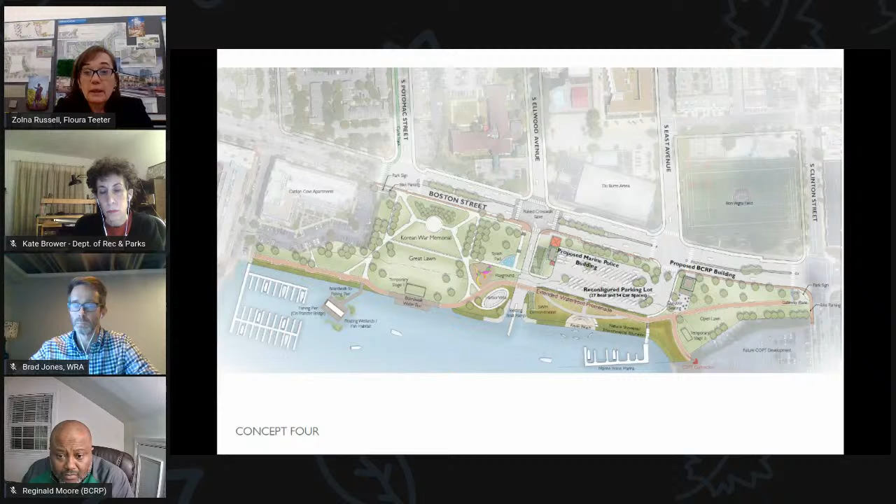So these are just some of the things that we've looked at. All of these concepts were presented to the public in public meeting number 2, and then we did receive quite a bit of feedback on that. This is just a summary of what we heard.

It was definitely preferred that the Marine Police stay on site. In addition to providing eyes on the street, they help people who go out in boats and get into trouble or get stranded. They do provide a lot of security. They've been a very good partner to Baltimore City Park and Recs at the Canton Park, so people definitely wanted them to stay.

Reducing the size of the parking lot was something we also heard as being desired. If you were involved in the earlier meetings, you'll recall that we did a parking study, which told us that the parking lot was actually sized adequately for the use, but then we took a look at who was using it, and there was a lot of use in the parking lot that was not necessarily related to the park. So we have looked at reducing the size of the parking lot.

The preference was for one building rather than several buildings scattered around the site, better access to the waterfront, providing a play space for children, reflecting the history of Canton and of Baltimore, providing more shade and trees, better access for kayaks, both informal and for programs, and then cleaning up the trash. So those were the things that we had in our minds as we went forward to develop this draft master plan.

As part of the master plan, there are several unifying design elements found throughout the park, such as benches, trash cans, improved lighting, and bicycle amenities. The promenade is probably one of the more dominant features of the park, along with planting more trees. Those are things that really pull it together.

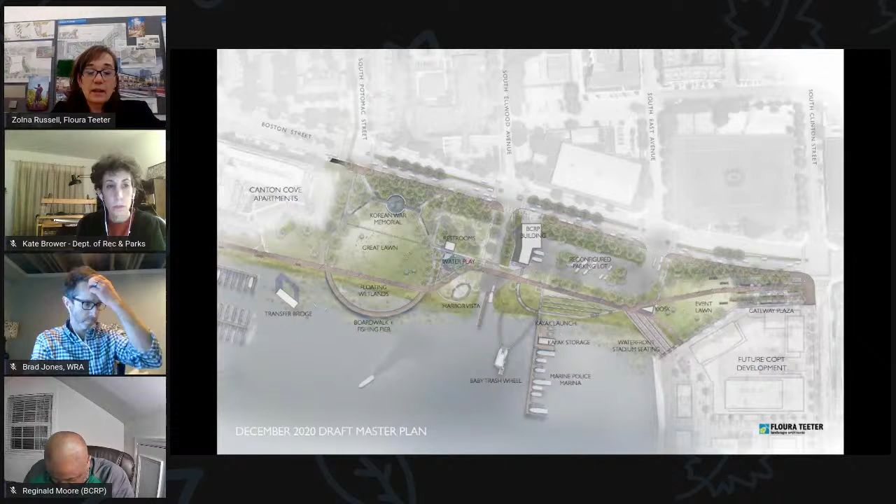So making sure people can arrive at the park safely is very important. And the bike cycle track that comes down South Potomac also has to have a protected crossing so people can get to the park via their bikes.

The parking lot has been reduced and reconfigured. It currently has 35 boat spaces, which translate into 70 car spaces. We've reduced it to 10 boat spaces, or 20 car spaces. This includes space for the Marine Police to have garages actually in the building so they can pull their boats in and out and won't need a lot of surface storage to store their equipment.

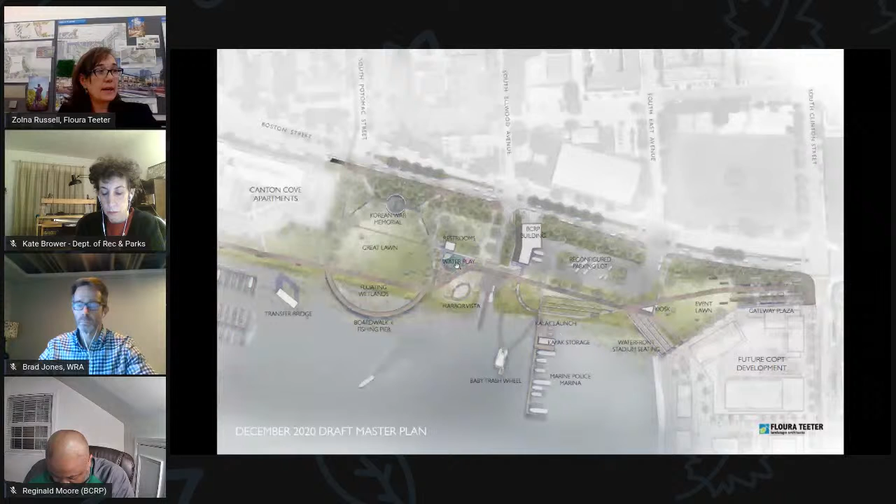In this area, we have an enhanced grove of trees with hammocks and other seating, a new restroom building, safe and clean, and a water play area, which is a combination of a splash pad and an artistic play space. We're envisioning unique and custom play equipment that can be used both when the water's on and when the water's off, creating an exciting opportunity for children who visit the park.

And then the Harbor Vista, which, if you've been to the park, you'll know is the promenade or the promontory, where you can stand and really see almost everything that's ever happened in Baltimore, right back to Fort McHenry, to the industrial waterfront, to new development happening in Tide Point and in the harbor. It's the perfect place to tell the history of Baltimore, envisioned as a place where history is interpreted to visitors.

And then the Great Lawn, where most of the WTMD concerts and big events are held, is enhanced by improving the lawn there.

A new low seat wall is envisioned for the border of the Korean War Memorial, not only to denote where that border is, but also to honor the Korean veterans with inscriptions carved into the wall.

And then the promenade, which comes into the park from the west, will continue across the Great Lawn, come up between Water Play and Harbor Vista, cross the boat ramp, and then continue south of the parking lot, and go up through the Gateway Plaza, where it terminates. This is intended so the promenade, which will serve both bicycles and pedestrians, connects to the Greenway across Boston Street.

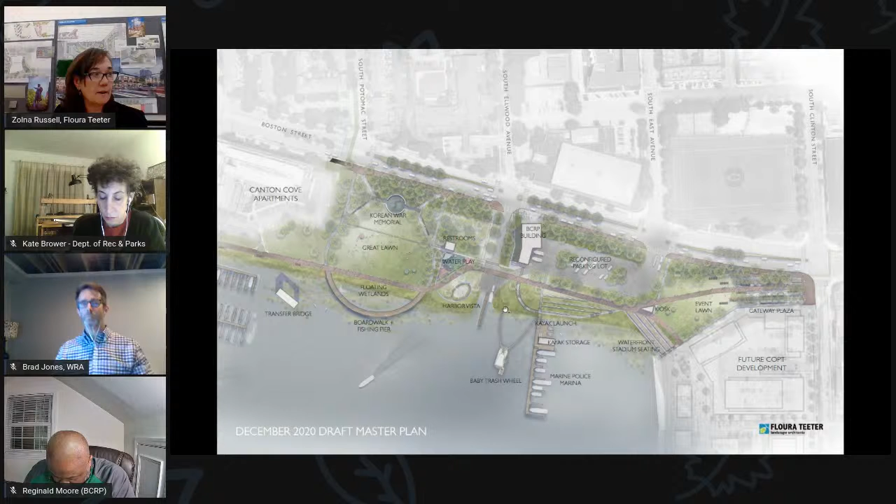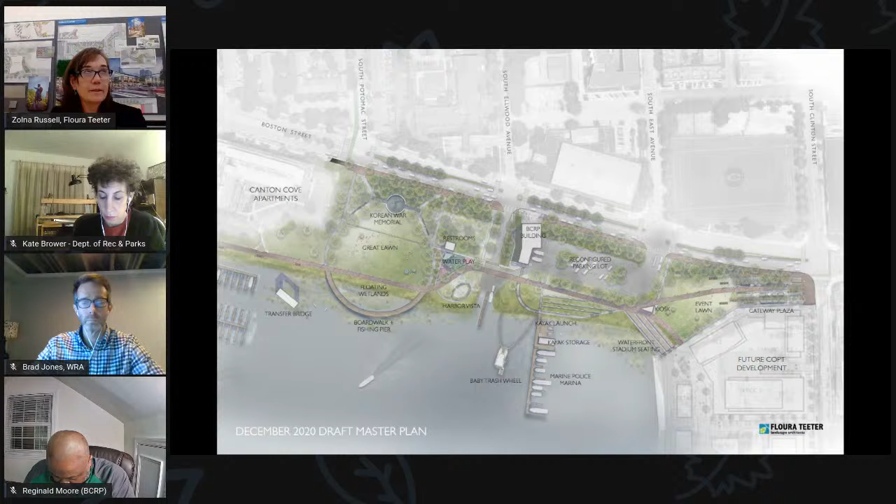Throughout, we're envisioning a softened shoreline planted not only on land, but also floating islands or floating wetlands in the water, along with aquatic improvements. We'll talk a little more about that as we move through.

This is the Gateway Plaza, and you can see how the promenade comes into the center of that, with fingers of decking, paving, and planting that transport you from the corner out into the park and towards the water. The white rectangles shown here are tents, which can be put in for a farmer's market or for events.

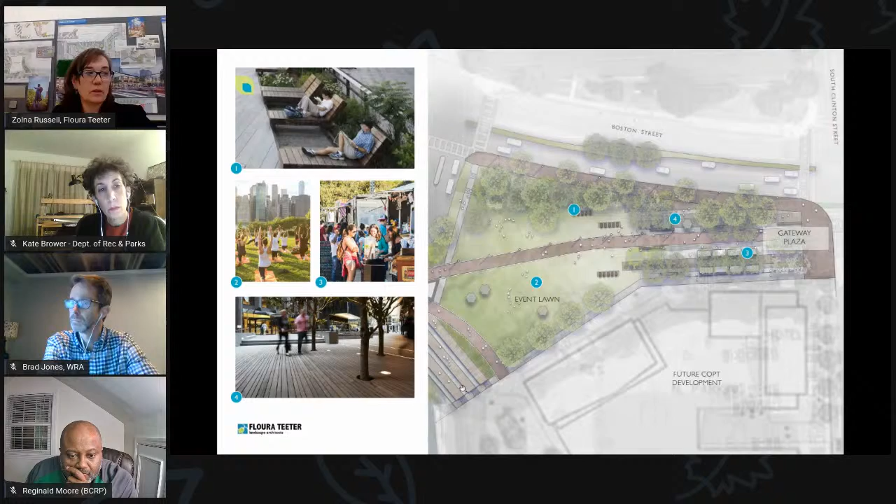Moving a little bit to the west is the reconfigured parking lot. As I mentioned, the Marine Police will currently be housed in this building. We don't really know what's going to happen with the Marine Police at this point, but we have planned for them to stay in the park.

If for some reason that doesn't happen, that building can be used for Baltimore City Rec and Park uses. Currently, it's envisioned as having Marine Police offices on the lower level, Baltimore City Rec and Park offices on the upper level, as well as a small rental space overlooking the water.

The reduced parking lot also allowed us to increase the efficiency of circulation. All of the parking lot has been laid out with boats and trailers in mind, so it's very efficient. It also allows us to put in two generously planted stormwater islands between the parking lot and the promenade, and terrace plantings below, which serve as seating, habitat, and environmental education.

The BCRP kayak program is envisioned for the lower level of this building, with several ramps taking you down to water level, where there's kayak storage and a kayak launch right at the water. This walk also takes you down to water level and then back up to the promenade.

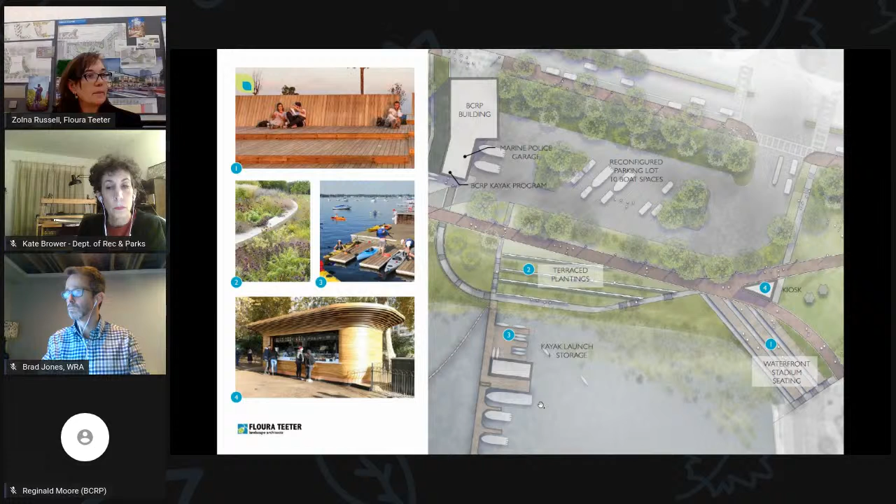Moving towards the boat ramp — this was one element of the park that was kind of a given. It had to stay in the park; we looked at moving it, but the way it's graded, it just wasn't possible. So the boat ramp is staying in its existing location, and there's really not a lot of opportunity to change that.

As I mentioned, there are a couple of pretty major storm drains coming out here, where the baby trash wheel is located to collect trash, and hopefully that will go a long way towards cleaning up what we heard was a fairly big problem along the shoreline.

Crossing from the BCRP building, there are several walks here, both the promenade and a pedestrian crossing, with new restrooms which we're envisioning as something more modern, light, and easier to secure.

This area, between this walk and Boston Street, will have enhanced tree planting, hammocks, and other movable seating to allow people to relax during events and on daily visits.

As I mentioned, the water play is envisioned as something that could serve multiple purposes. It could be an interesting feature even when no children are there, but also provide fun and interesting activities for kids in the summer months.

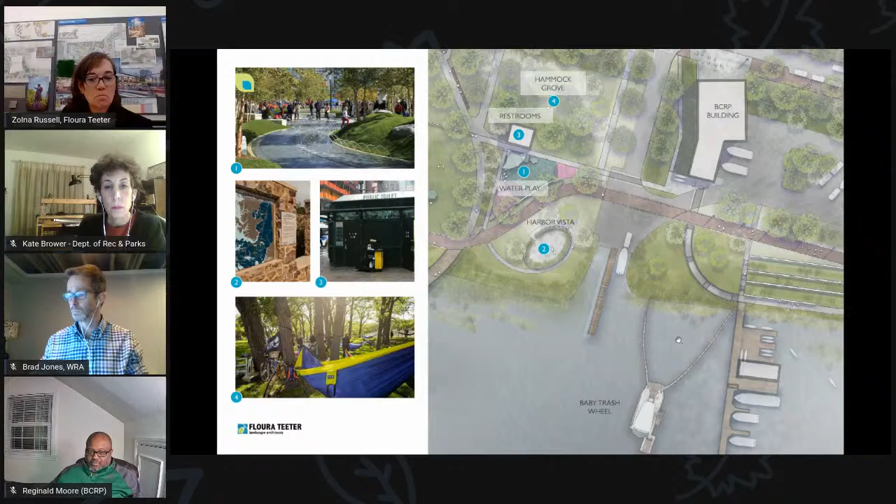The Great Lawn is terminated by a boardwalk, which goes out into the water and back in. The fishing pier will be located on this boardwalk, allowing us to provide better amenities for fisher people, including cleaning stations and trash cans. The aquatic enhancements between the boardwalk and shoreline will also improve fishing in the park and beyond.

The Great Lawn is an open area intended for more spontaneous uses and events. We haven't shown the stages in this plan, but they would most likely be located where they currently are, and then on the other event lawn. The promenade comes through and continues on up.

Originally, one of the options we looked at was connecting to the transfer bridge, but we decided against it. It was a little too close to the shoreline and ended up cluttering the landscape trying to create a connection there, so we took that out of the plan.

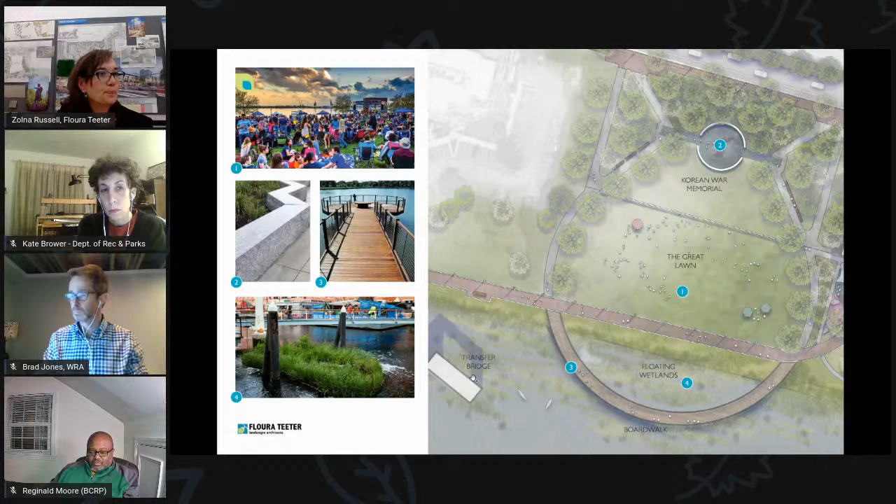These are some sections which show how these various elements relate to the grade. The upper section is the restroom, going through water play, the hammock grove, up to the Harbor Vista, where you get a great view of the water, and the boardwalk which comes in.

The lower section shows the conceptual design of the building, which has a green roof to allow people to go out and look over the parking lot, the kayak program on the lower level, and the promenade going down to the Waterfront Stadium seating here.

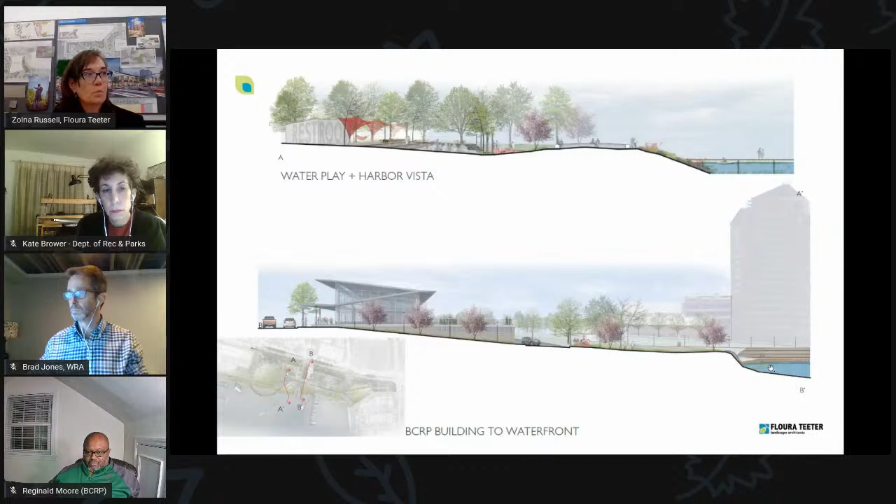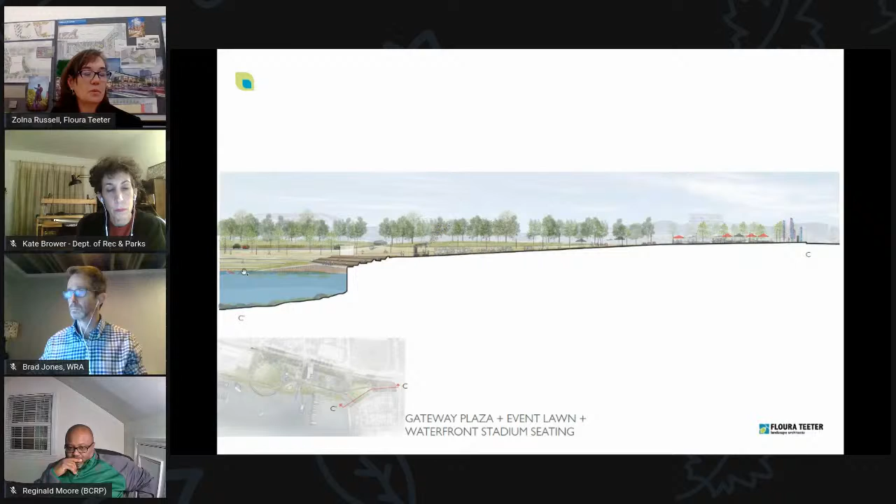This section goes from the Gateway Plaza, at the corner of Boston and Clinton, through the plaza, and you can see the gently sloping event lawn. We're showing a temporary stage here for events and concerts, and then the Waterfront Stadium seating, which really allows you to get very close to the water.

And then these are some images of what that might look like. This is the Gateway Plaza looking out towards the event lawn. It's very...

Sorry, I lost my train of thought.

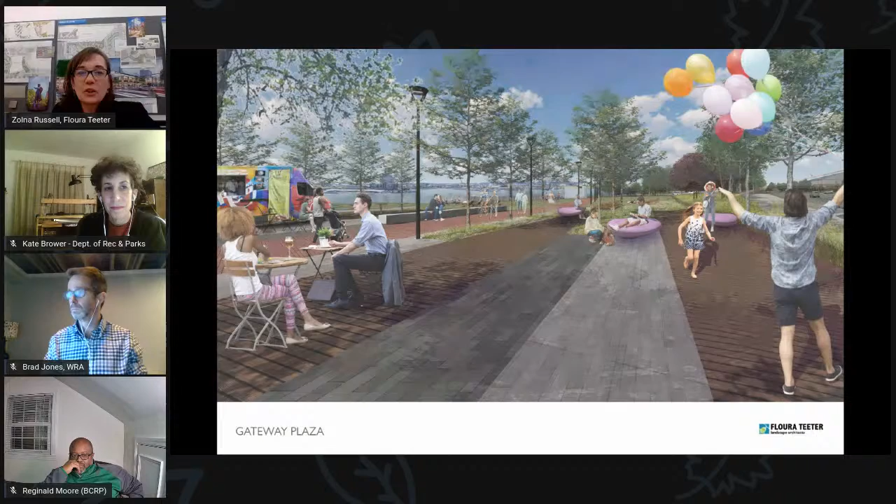Very lovely and inviting, and really integrates the promenade nicely into the gathering space.

This is an image of standing on the boardwalk looking back towards the park. You can see the building in the distance here, the restroom building, water play, Harbor Vista, and then beyond.

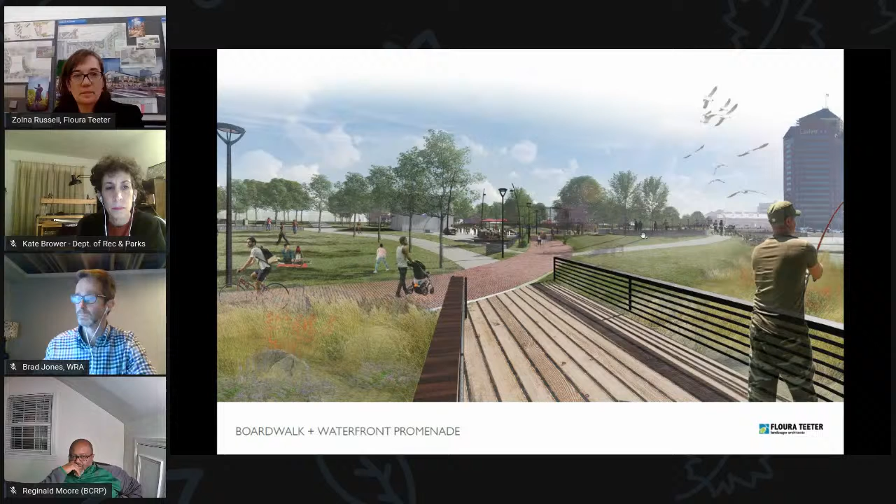I wanted to point out a couple of things we've thought about as part of the plan development, and making sure bicyclists were accommodated was one of the priorities. We met with the Greenway folks and wanted to make sure this park and the promenade specifically could accommodate both bicyclists and pedestrians. So the waterfront promenade is widened a little bit as it goes through the park to make that accommodation.

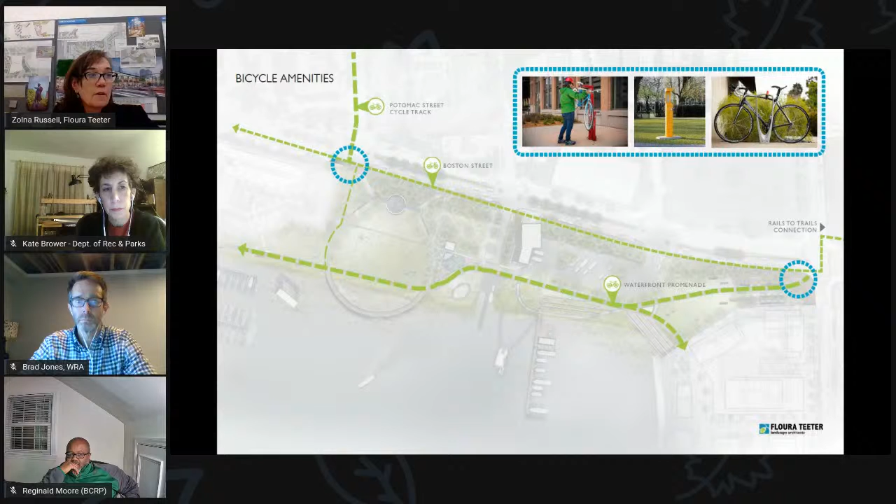In addition, we have bicycle amenities proposed at the terminus of the Potomac Street cycle track, as well as the Boston and Clinton intersection at the Gateway Plaza, because we want to make sure this park is very usable and friendly to bicyclists, but can also accommodate them while accommodating pedestrians and other users.

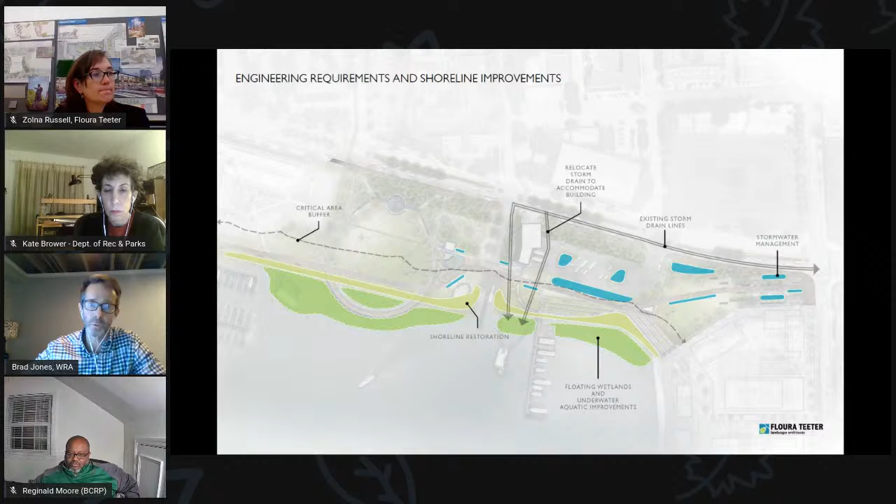And the other one is to the right, which is an existing system as well, but will have to be relocated slightly to allow for the new building. We will maintain the same outfall for that system. Both of those systems will outfall into the harbor right at where we're talking about putting the baby trash wheel, so that'd be a great amenity for the project.

As Zolna mentioned earlier, we're going to move the promenade away from the shoreline and allow for the shoreline to be a more natural environment, with improvements just like she talked about. We're also going to remove the bulkhead that exists where the water taxi stop is now, and we're looking into relocating that water taxi stop to another location. When that bulkhead's removed, we'll make that a more natural shoreline, and the promenade will extend out into the water along with floating wetlands and other aquatic improvements that Zolna mentioned earlier.

I just wanted to mention that the water taxi stop is envisioned to move to the COPT property, so it will still be in close proximity to Canton Waterfront Park. If for some reason that doesn't happen, it could certainly be accommodated as part of the park development.

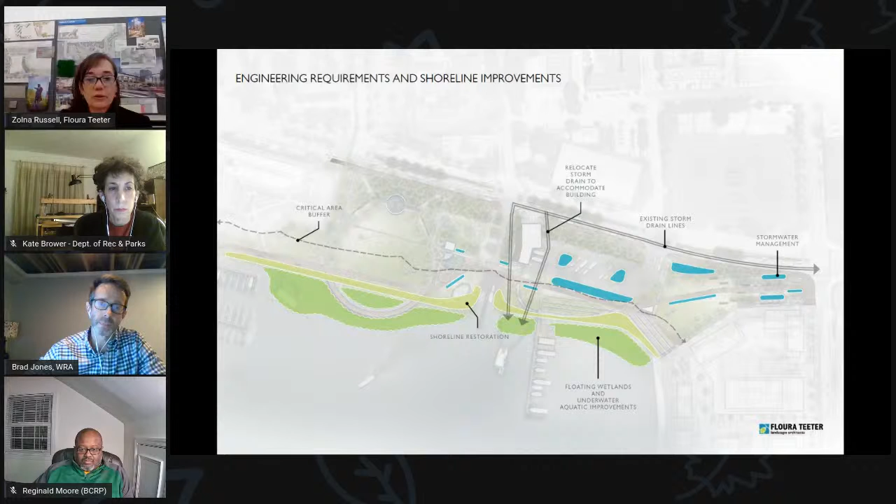We also show on here the critical area buffer that's required by the Critical Area Commission to maintain, and we try to reduce our development within those limits. We also looked at the 100-year floodplain and made sure the buildings stayed out of it, and also took into consideration sea level rise that could occur, placing the elevation above that. The park is really planned for resiliency, to allow the water to rise and fall without any major damage to major infrastructure.

Thank you. That's it, so.

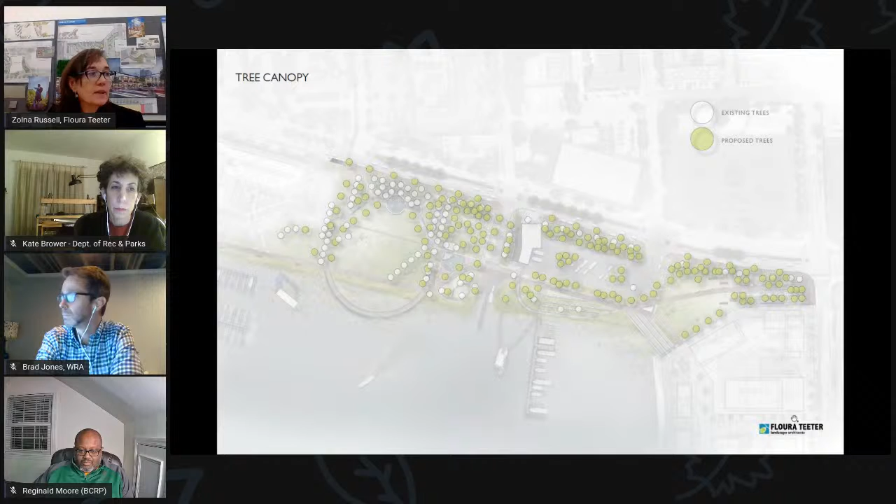I just wanted to highlight the change in the tree canopy. If you'll recall from the aerial photo, there really aren't a lot of trees in the park currently — probably 30 to 40% of the park is currently paved. So the tree canopy proposed as part of this park development is really an improvement, and we were striving to hit the city's 40% tree canopy goal. Most of the existing trees will remain, and many more will be planted.

I see a couple comments coming through in the chat, so I wanted to pause and answer them. Somebody asked when COPT is going to start and whether there will be a large marina there. Perhaps someone from COPT is on the call and can clarify, but our understanding is the COPT development is still pretty far off in the future, and we don't know whether there will be a marina there or not. Since they didn't have any definitive plans at this time, we designed the park as we thought it should be, and since it's a phased plan, things can be adapted if something changes on the COPT property. So does anyone else have any questions?

Thank you, Tony Romero, who said, yay, 40% tree canopy. I agree.

So now I'd like to talk a little bit about the phasing and implementation of the park. As Director Moore mentioned, this is a long-term plan, so there are many phases as you'll see here. I just want to remind everyone that the Boston Street improvements are really part of the Department of Transportation's purview, so they'll be done as a separate project. The sidewalk improvements we have assumed will be done as part of our project. So when deciding how to phase this project, we tried to look at things that could be implemented relatively inexpensively and easily, without a lot of major infrastructure change. That's how we arrived at phase 1A, 1B, and 1C.

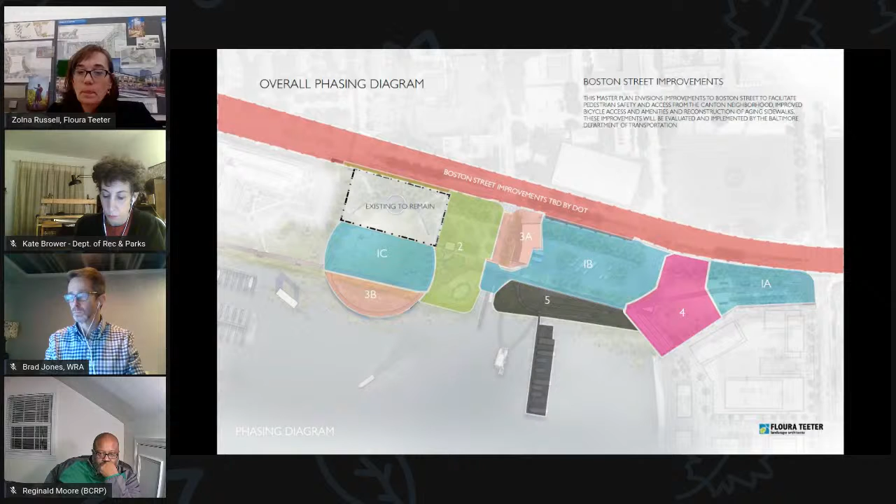1A is the Gateway Plaza. The storage containers that are there currently are apparently not in use and could be easily removed. There's a lot of pavement there that could also be easily removed to create this important Gateway Plaza. This is something that would have an immediate effect not only on the park, but also on the neighborhood, and would be a really good first start.

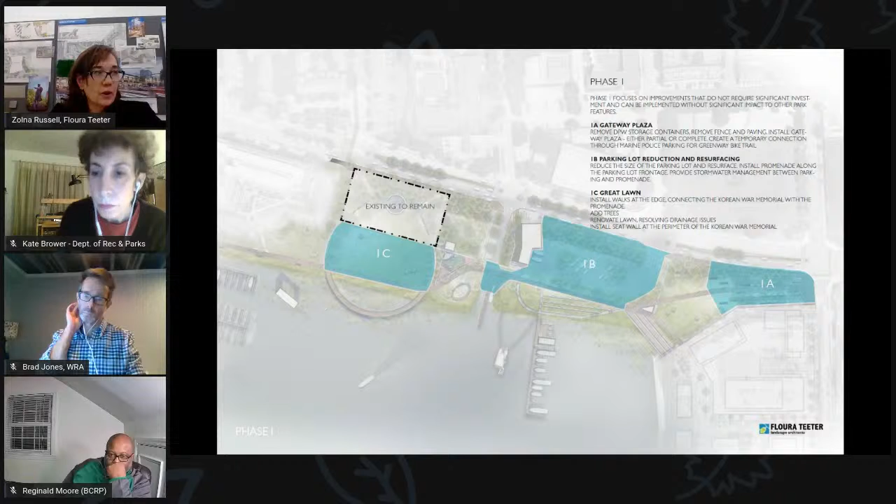Phase 1B would be reducing the size of the parking lot. That would not include the changes that would need to happen as part of the building project and the Marine Police project. So during phase 1A and 1B, the existing building is still in place with a minimal amount of parking for the Marine Police. That creates a bit of a bottleneck for the promenade going through, so we're assuming some temporary installation connecting those two phases would be put in place for the duration.

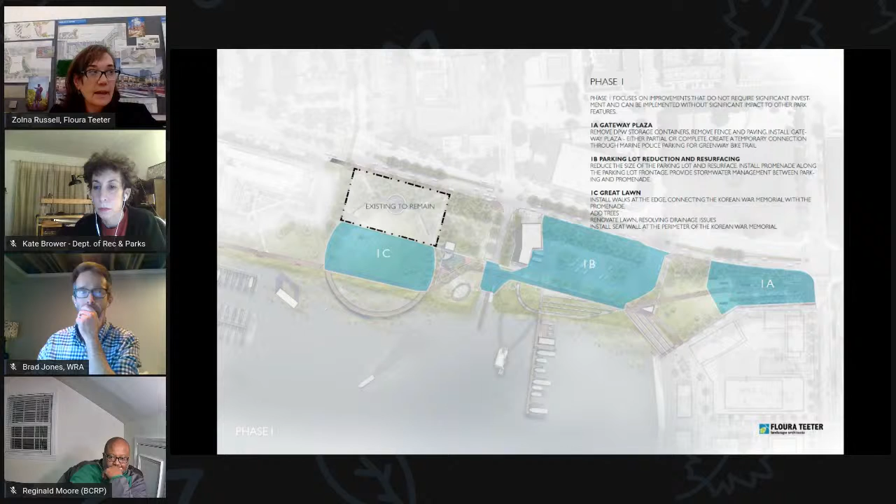And then phase 1C is improvements to the Great Lawn — creating the walkway network you see here, improving the lawn. We know there's a drainage problem there, so finding out what's causing that and resolving it, and then putting in the low wall at the Korean War Memorial.

Phase 2 is envisioned as the Hammock Grove, the restroom and water play, and then Harbor Vista. These are all features that involve a little more design, but also provide great amenities for the city and the neighborhood.

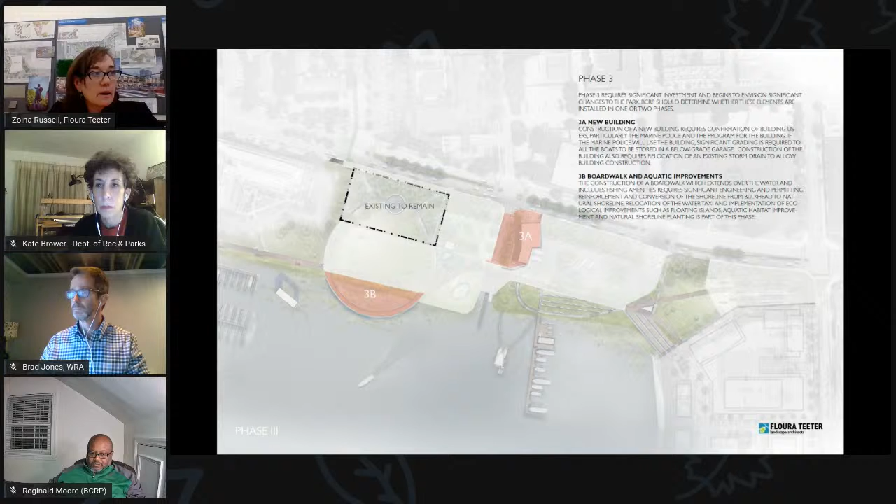Phase 3A would be the new building. Obviously, that is one of the more expensive elements in the park, so we wanted to give time to make sure that it was sized and designed properly, and the funds could be found to build it. As part of 3A, the parking lot revisions to accommodate the Marine Police would be made.

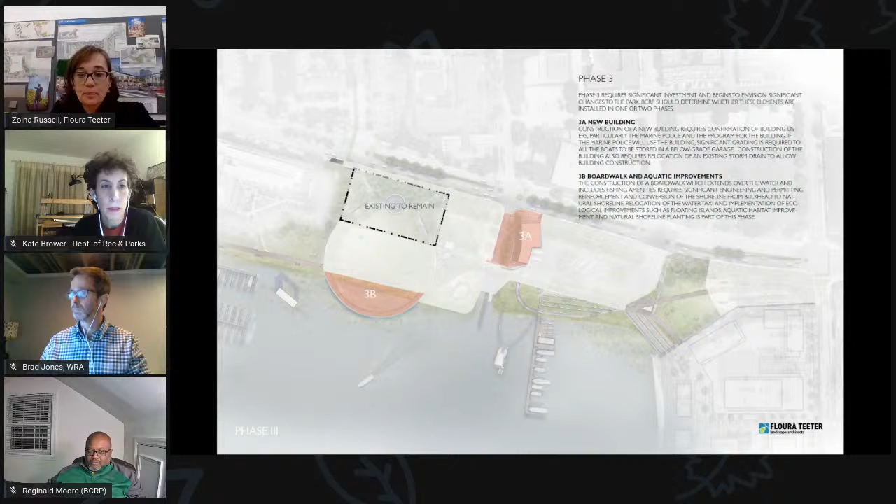And then 3B is the boardwalk, which extends from the Great Lawn and goes out over the water. In phase 4, the Marine Police building and parking lot would be demolished and the event lawn created, and the promenade reconnected for the full.

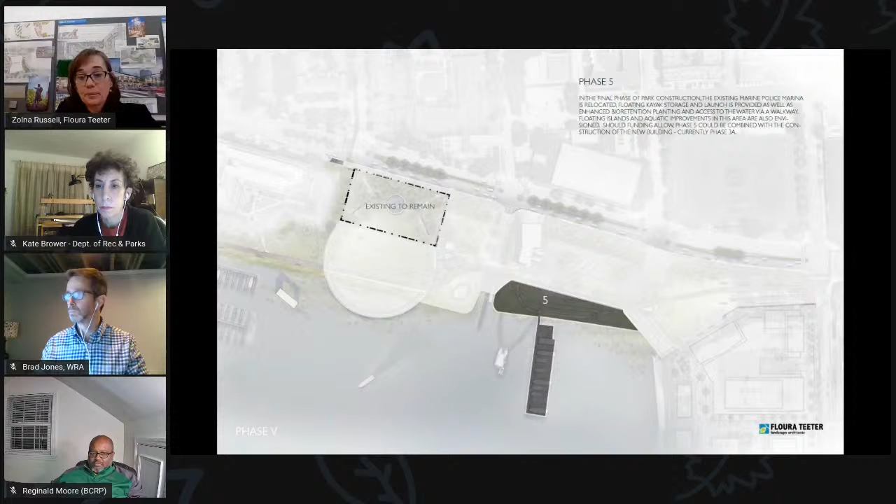And then phase 5 are the waterfront improvements below the promenade, which would be the terrace seating, the ramp down to the water. The Marine Police Marina would be relocated to create the boating cove, and then the trash wheel. So you can see it's a long process, but a good one.

And then we've taken a look at what this might cost, and as you can imagine, there is a substantial investment to be made, but Director Moore, I don't know if you have any further insight on this, or Kate?

Yes, sure. Director Moore, did you want to? No, Kate, I'll let you go ahead and respond.

Okay, yeah, so the city, this is because this is such an amazing project, and it has quite a high cost. As Director Moore said, it really is going to be a 10 to 15 year long-term plan, and hence the phasing that Zolna just discussed.

The city will likely put in some funds, but the main focus will be looking for private funds to invest in this amazing park. So that's where we're looking right now. We do not have any details about how we're going to be raising the funds. That will be a discussion that will be taking place after this plan.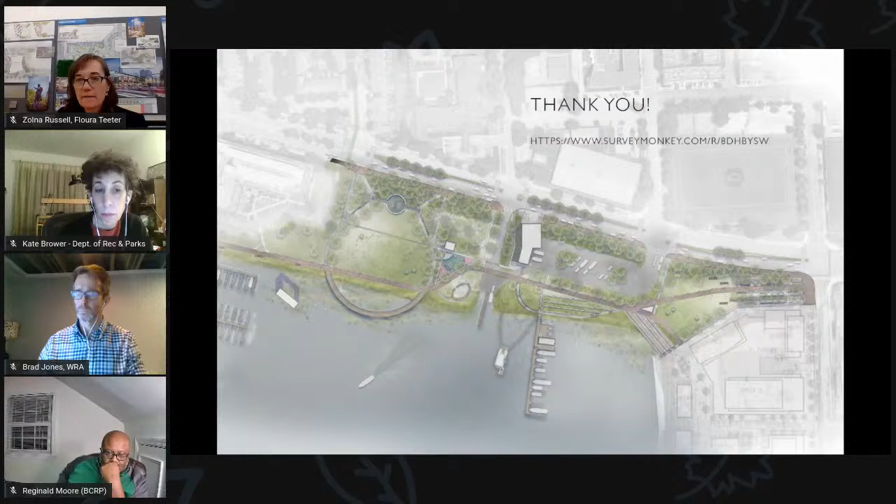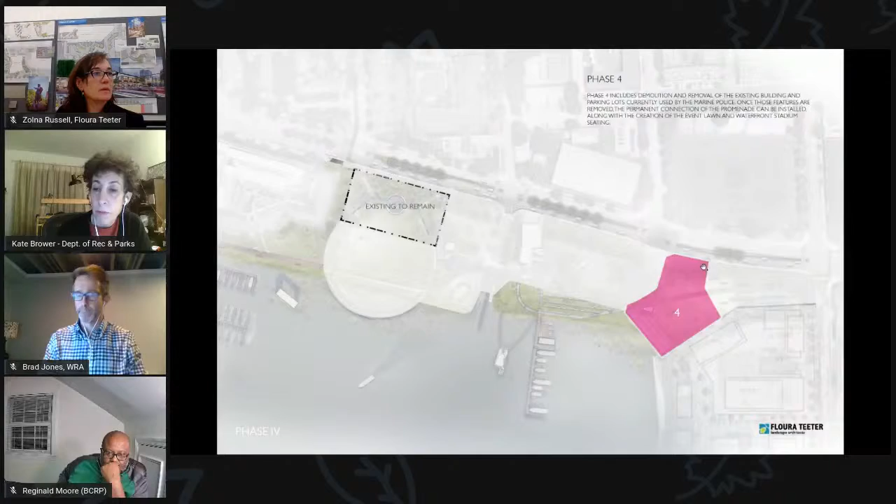Are there additional questions or comments? Oh, there's a question about information on Rec and Parks' programming for kayaking from the park. Rec and Parks is currently looking at expanding our outdoor recreation programming. This is something that will be developed over time, so we don't have exact plans yet. We have a very robust kayaking program happening out of Middle Branch, and what we'd like to do is provide kayaking on this side of the harbor at Canton.

But there are really no facilities here to store any kayaks. Our main person who ran the kayaking program in the past would bring kayaks over in a big trailer to Canton and provide some programming. So the idea is to provide it on a more regular basis over time. That will be developed—we don't have it set yet, and of course we need the facilities first before we can really expand that programming here.

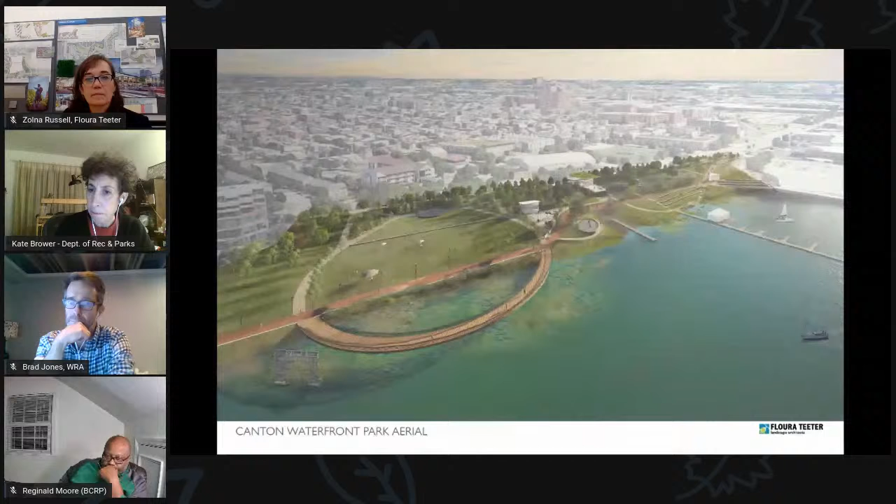There are also a couple questions on funding. I see one about federal grants as an option for the project. Yes, they are, and that's something we will be looking into. The National Park Service has an annual grant through the Land and Water Conservation Fund, and this could be a candidate for that.

Kate, I want to go back to Mr. Ellis, he had a comment and he's absolutely right. As Kate shared earlier, the agency is looking at moving away from just developing individual master plans. However, this master plan started 4 to 5 years ago. I've been here a little over 3 years, and our goal now is to create a comprehensive plan to look at these various master plans.

When I got here, the question was about the multiple different master plans done for various parks that then sat on the shelf with no funding, and that's not something we want to do going forward. One of our first steps as an agency is looking at the city as a comprehensive approach, looking at existing master plans and figuring out how we accommodate the needs of those plans created years ago, some dating back 8 to 10 years, as well as how we move forward. The best way to do that is with the comprehensive plan.

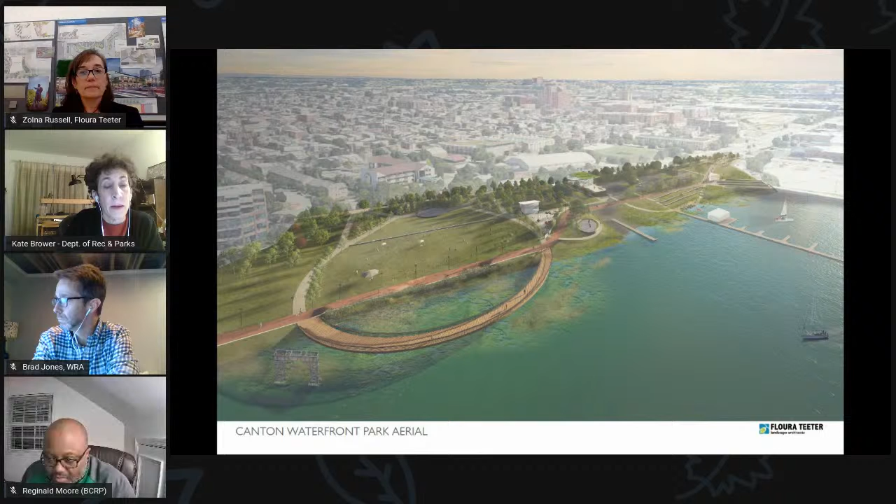As I said, there is no funding for this park, and we're constantly looking at balancing. Our priority is to serve the most underprivileged parts of the city, and that's where our priority lies. However, there are some needs in other neighborhoods as well, and as we said before, there's huge residential new development happening in this area. So we don't have any funding at the moment, and we'll be looking at developing a plan for that as we move forward.

Thank you, Kate. Anybody else have any questions or comments they'd like us to answer right now?